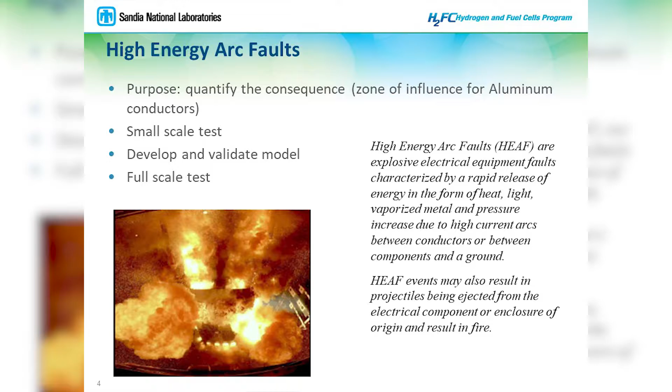So we call them HEAFs. They're high energy arc faults. One of our customers is the Nuclear Regulatory Commission, and they have the regulatory power over nuclear power plants. And these are very important places that you don't want to have fires. And one of the things that we've been looking at is trying to quantify the consequence of a high energy arc fault. You can see in the italics the definition of a high energy arc fault. It's basically

electrical equipment like switchgear, where there's either a fault from phase to phase or phase to ground, and it's caused by like loose connections or dust or a squirrel, anything can bridge this gap. And some of the electrical cabinets in a nuclear power plant are really high voltage, really high amperage, and you get a very energetic release. And it creates plasma, which is also conductive, and it's crazy.

So when you do a risk analysis for a nuclear power plant, what you're looking at is what is the probability that you can't turn it off when you need to. Okay, so it's a core damage probability. It's probability of melting down your core. So there's certain cabling that goes through the power plant that you need to turn it off. And so every compartment in the power plant is analyzed, and every type of scenario fault.

And so when we look at a bank of electrical cabinets, we say, what would happen if this one blew up? And we calculate the zone of influence around that electrical cabinet. And we say, okay, if this cabinet dies, will we impact any of those important cables that we use to turn the power plant off?

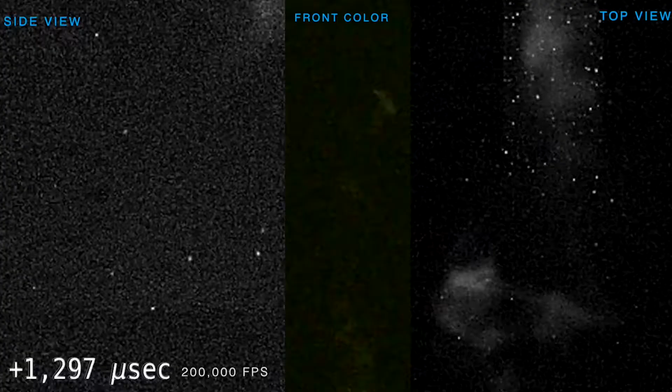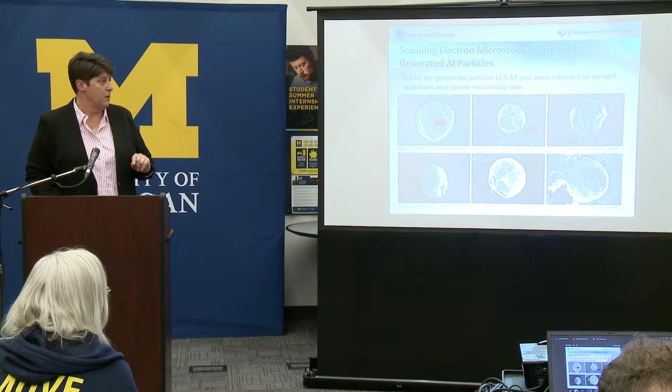But we didn't wait to get the model for the full-scale test. I'll show you those in a minute. But around the test, I didn't put a picture of the test setup, we're capturing some of those particles with carbon tape and aerogel. Aerogel is like 99% air. It's silicon dioxide, and it's really pure and clean, and so every little particle that gets stuck in there, we know we can analyze.

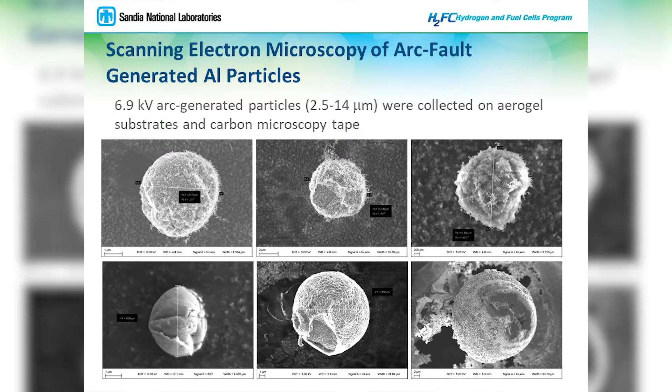And so with the SEM, the microscope, and there's another on the next one. But these are close-ups of some of the particles at nanoscale, and you can see where they're spherical, so we can tell that it was molten. And then you can zoom in and see these dendritic growths, and we can then send those through the analyzer and tell what's the makeup of those particles, right? How much is aluminum oxide?

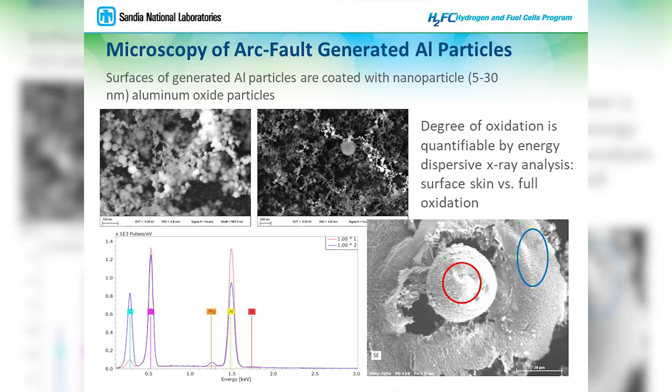How much is copper? We used a copper shorting wire between the aluminum bus bars, so we know what material came off from the shorting wire and what material came off from the aluminum, and then how much aluminum oxide was formed. So this will all go into the energy balance, and we can learn about the excess energy release above copper that aluminum is contributing to this event.

So we did full-scale tests 2 weeks ago, so this is pretty new stuff. There's a facility outside of Philadelphia called KEMA, and they have 9 test cells, and their largest test cell is here. So they've got 3-phase power coming down the side. We park our electrical equipment. We had 4 identical electrical cabinets, just basic switchgear.

We did all 4 of our tests at 6,900 volts. We did 2 different currents, 26,000 amps and 32,000 amps, and then we did 2 second and 4 second releases of the arcs. And so this KEMA facility can generate all the energy, store it up in these big capacitors, these Marx capacitors, and then let it go in the 2 seconds or the 4 seconds. And we can't do this at Sandia without causing a brownout at Albuquerque.

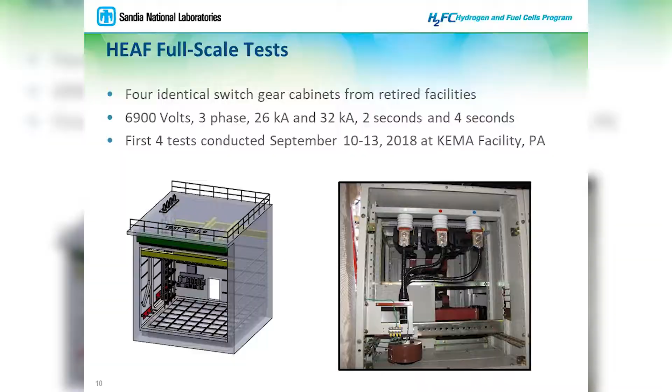So this is a close-up of the inside, like if you take the door off of the electrical cabinet, and these are the 3 phases. These are the bus bars. They just look like bars, and they're coming out at you, and then they're turning down. And then there's an insulator above it in the switchgear. So what we did was wrap a shorting wire, like 24, 32 gauge wire, around all 3 of the phases, so that we knew we were causing a short, and we could make a good boom.

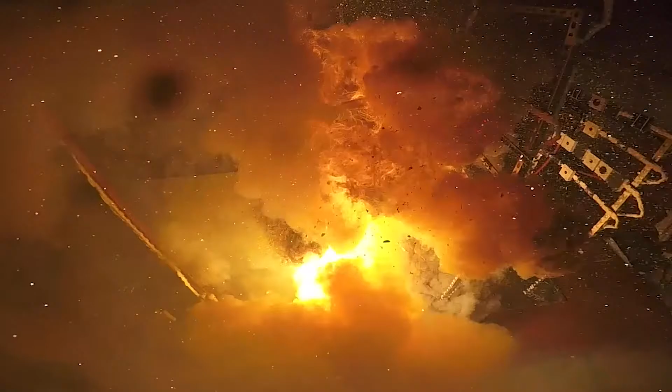And so now I have the color video. So this is about a 5-minute video, so I'm going to keep talking while it's going. So what we're looking at is a GoPro, because those are expendable. This is a GoPro up at the top corner of the largest test. So it was the 32,000 amps for 4 seconds. And it's slowed down pretty slow.

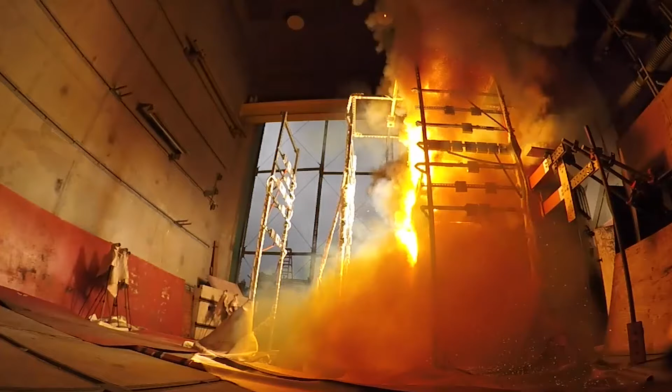In front of it there's 5 different instrumentation racks, one on each side, 2 in front and 1 on the top, and we're measuring with radiometers. We're trying to capture the maximum temperature. We also have carbon tape and aerogels in the instrumentation racks to capture some of the particles that are coming off. This is the other GoPro we have down on the other corner.

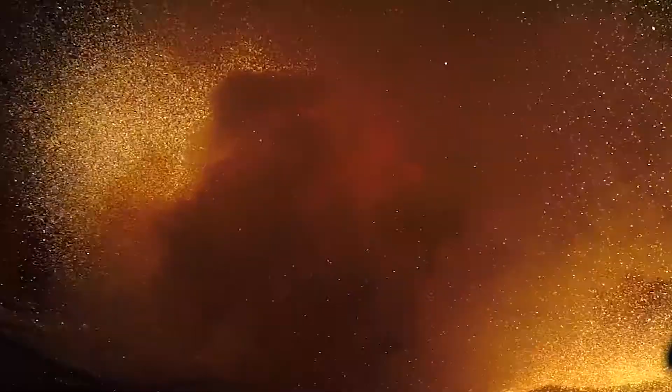And this is slowed down again, it takes about a half a second to breach the cabinet. And so you see the flames venting out of the seams of the cabinet enclosure, and then you can see it breach the cabinet wall. We have several other views that'll keep going, but you can see the zone of influence. You can see where there's a lot of high energy, high temp. We're trying to measure the pressure wave, the shock wave that's coming off, and you can see the hole that it created in the cabinet. I mean, it literally, in 4 seconds, vaporized 4 square feet of steel cabinet.

We also put a camera, this is how you don't get hurt. We put a camera in the test cell, and it's right over here, and it's aimed at a really high quality mirror. And so you'll see later on this camera's view right at the front of the cabinet. There's several views. We had a bank of cameras outside the test cell. And you can see the smoke pretty quickly obliterates your view, and you can't really tell what's going on. But you wouldn't want to be in that room. Nobody. So we didn't hurt our camera, but we're trying to see inside the smoke what exactly is happening.

And so some of their cameras have a high dynamic range, and so you can see the difference in the video. We also had an IR camera, and what they can do is overlay the IR camera on top of the real picture, and then you can see through the smoke, and you can actually measure accurate temperatures off of it. This is the mirrored view, and you can see the front of the panel. See how it buckled? So that's the initial pressure wave of the arc. We did put some carbon tape and this other material that we could analyze later for the graphene structure to try to capture the maximum temperature inside that.

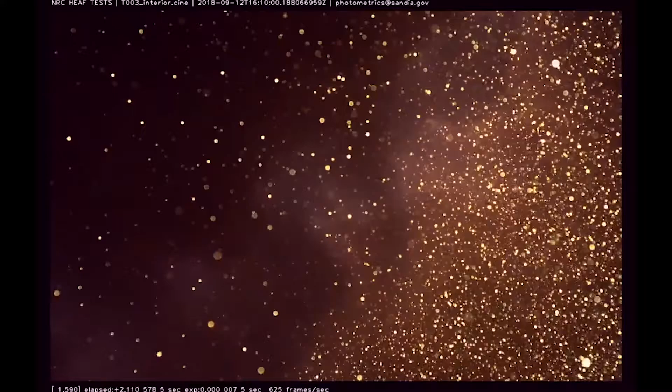So here's the half second. You can see it vaporizing the front of that steel, and then you can see it breach. So that was all half a second. And then it continues to cut that in half. So again, it gets obliterated. And you saw that it breached, and then there was like a step function in the energy. And so that's what we want to study, because that's when the aluminum gets involved, and you can see it.

This is almost the one where he's superimposed the infrared on top of the, you can see the particles, because they were capturing them. What happened in the middle of this test, there's an instrumentation rack on the top, and all of its lines for the data acquisition system got severed. So on this test, they lost all their data from the top.

So here we go. Here we've superimposed, so you can see this through the smoke. You can see it venting out of the sides of the cabinet. And then you'll see it breach the front. He slows it down for me. Sort of like a dragon. Yeah. And then you'll watch it. It's breached, and then it jumps. And you can see the wires dangling.

What we found in the small scale test was that the arc is made, and then the buoyancy of those hot gases causes it to rise up and break, and then the arc reforms. And you can see it pulsing, and we saw that only in the small scale. So when we're looking at the large scale, we're seeing that pulsing, and we're going to decide whether it was the phase, the normal sinusoidal pattern of the power, or if it was the arcing breaking and reforming. Pretty cool stuff.

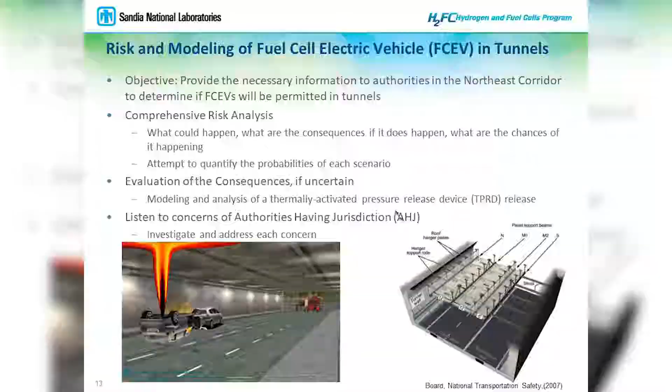Okay, so we did a comprehensive risk analysis. What could happen, right? And then if it does happen, what are the consequences? And then what are the chances of that happening? If we understood the consequence pretty well, we said, okay. If we didn't, I didn't know. He's like, is my concrete going to spall? I'm like, I don't know. Let's find out, right?

And we got tunnel data, real data from the US if we could find it, worldwide if we couldn't. So we have data from Norway, we have data from whatever's published. And we could do sensitivity analysis around these probabilities because it's easy to build a Monte Carlo on this event tree.

And what we use to determine minor or severe is if an accident had injuries or fatalities. So if nobody's hurt, it's probably a fender bender, and you probably haven't hurt the hydrogen system either, right? We also have data from NHTSA doing crash testing. There's not a lot of tests. They've only done 5 or 6 full-scale tests with a fully loaded hydrogen vehicle with the same side impact, rear impact, corner impact tests. So we have that data. None of their tests released any hydrogen. So that's reflected in this too.

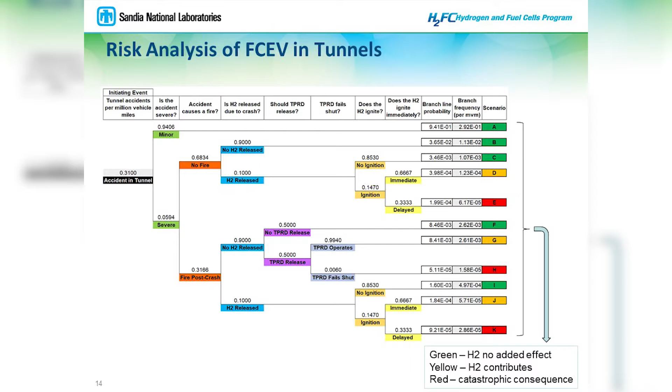And we made worst case decisions always. The hydrogen tank was completely full. It was one tank instead of 3 tanks, like the Toyota vehicle, right? So we're releasing all 6 kilograms instead of just 1 tank's worth. It takes about 5 minutes to blow down a tank through the TPRD. And so we assumed that the maximum mass flow rate was coming for the entire 5 minutes. We really made this very conservative worst case estimate. And so you can see we calculated what the temperature might be at the ceiling, just using numerical calculations.

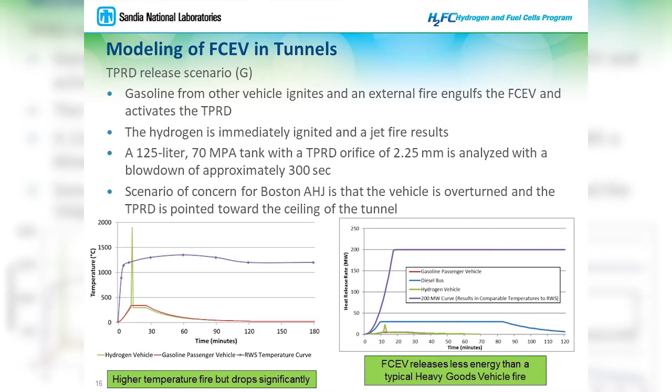But the heat release rate, if you look at it, here's that tanker truck burning. The blue line is a bus. And so a light passenger vehicle just venting its hydrogen into an existing fire, which is already a problem, doesn't violate the heat release rate regulation, but the temperature went over. So he said, analyze this for me. Find out, is my steel going to be compromised? Find out if my concrete's going to be compromised.

And so this is the schematic I was talking about, where the bolts are anchored up into the bedrock. And we put a fire conservatively right on that steel support, so that we could have the best chance of getting the heat up these hangers and into the bolt. We looked at 2 different typical tunnels in the Boston area, and we looked at the potential for spalling the concrete.

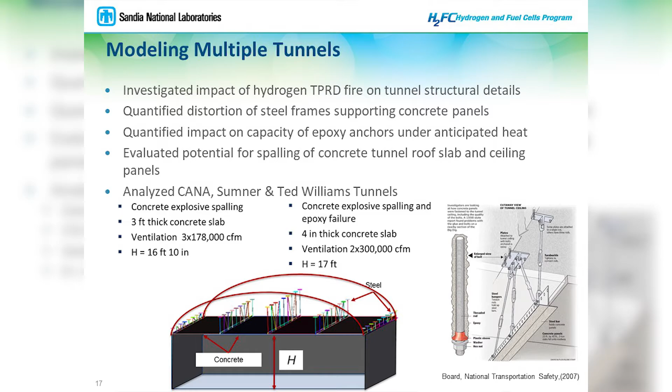So we did this with and without ventilation. Tunnels have ventilation. Some older tunnels have crappy ventilation, and sometimes the ventilation kicks up to a higher level during an emergency, and sometimes it doesn't work. So we're like, okay, conservative. What if the ventilation's not working at all?

And so we looked at this hot spot on the ceiling. You can see it's about a 12-foot diameter hot spot, and it gets pretty hot. It gets close to 2,000 degrees. It's not going to last 5 minutes, but it could, if it vented for 5 whole minutes, if the flame stays touching the ceiling.

The thing about hydrogen, there's no carbons, so it doesn't radiate. It radiates very weakly. So you could hold your hand this far away from a hydrogen flame and not move it. It's not hot next to it, it's hot in it. And it's very hot in it. So as long as the flame is touching the ceiling, you get this hot spot. And so we have CFD models and heat transfer models of the concrete panels and the actual tunnel itself.

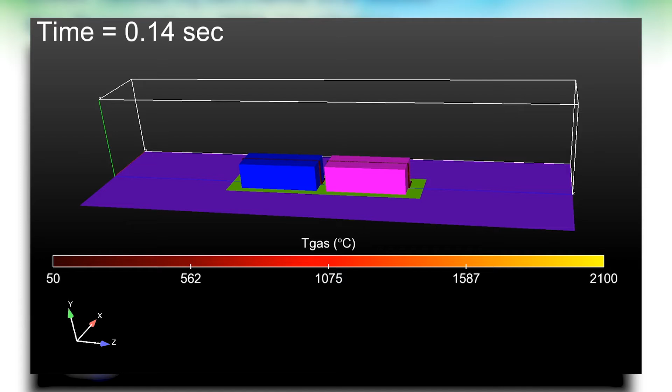And then we turned the ventilation on. You can see that was a 12-foot diameter hot spot. With the ventilation on, it blows the flame over like you would expect. These models were developed for nuclear weapons, so they're really, really precise. So I trust these models. These aren't models that you can use. They're internal to Sandia only, but this one's called Fuego. It's fire.

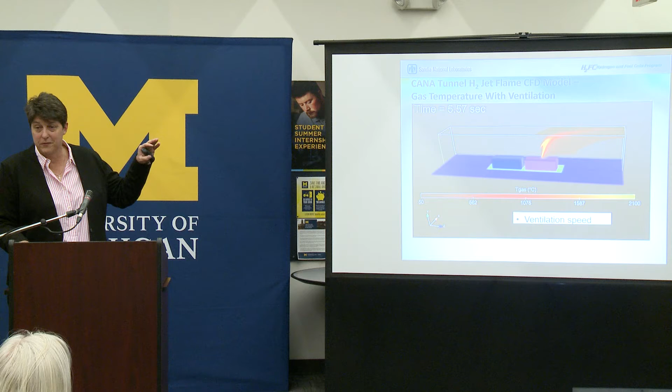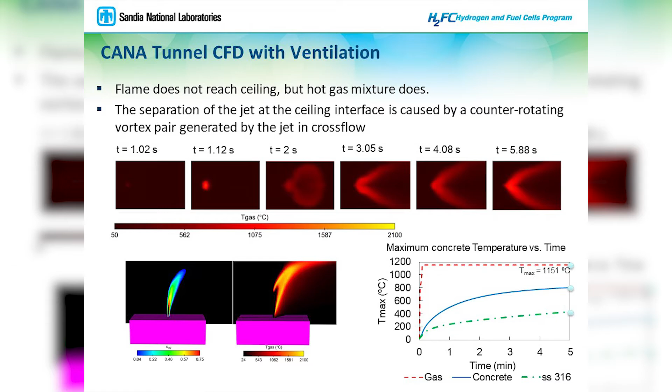And so we can take the boundary conditions at the top of the tunnel and import it into the heat transfer model, which calculates the heat transfer through that block of concrete. With the ventilation on, you get this vortex that's pretty well documented in fluid flow. And you can see it's more like a 7-foot diameter. So ventilation really helps lower that hot spot. It also lowers it out of the 2,000 degrees to under 1,200 degrees. So it takes a lot of the heat out of that hot spot.

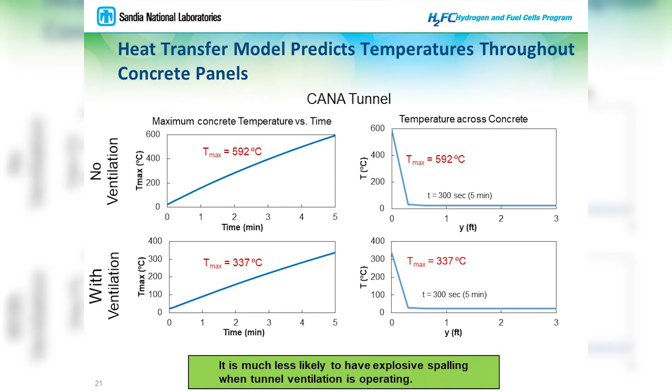So then we looked at the maximum temperatures and compared that to other research on concrete spalling. We found it takes about 30 minutes of exposure to a hot fire to make the explosive spalling happen. There's several mechanisms, it's actually kind of complicated. But we're nowhere near. If it were a straight up blowdown, the flame would be impinging on the ceiling for about 1.5 minutes, not 30 minutes. So we were able to tell the structural engineer that it's really unlikely you're going to spall from the hydrogen. If you've wrecked several cars and you have a big hydrocarbon fire, you could probably spall. It happens now. You can find pictures of tunnel spalling.

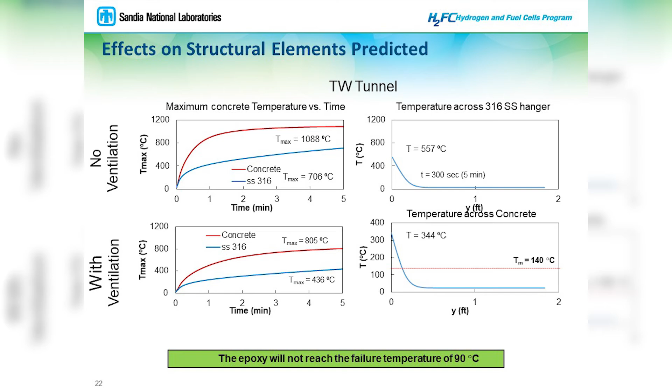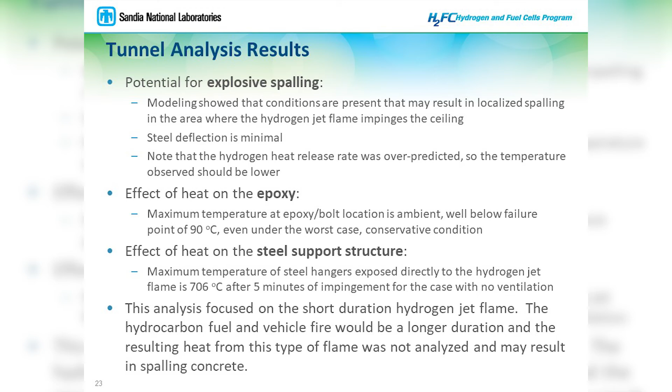On your steel, the epoxy melts at 140 degrees, and it starts to degrade around 90 degrees. What we found is up at the top, at the shortest hanger, the epoxy is still at ambient temperature. So we can tell them, your concrete bolts are not going to come out of your tunnel. Concrete's not going to fall on people. And so he said, yeah, this is great. I'm going to buy a hydrogen vehicle. These are safer than gasoline because the hydrogen stays in the tank.

But our problem right now is that he was not the lead engineer for Massachusetts Department of Transportation, and he recommended to the lead engineer that they allow the vehicles, and she said no. She didn't want to accept any additional risk because she didn't even read our report yet. So we're working on that. It's a reputational risk, and nobody wants to be first. Nobody wants to be the first one to allow these vehicles in their tunnel.

So now we're working on a national solution. Instead of tunnel by tunnel, I'm working with the Federal Highway Administration and NHTSA, and we're going to try to get all the tunnel owners together in a stakeholder group to say, give me your nightmares. I'm going to show you what the real analysis shows and you can decide. And maybe we can say, tunnels that have good ventilation, sprinklers, an emergency egress tunnel, because they're worried about public safety.

Those tunnels are fine. And so it may be that the Holland Tunnel and the Lincoln Tunnel that were built in 1927 don't ever allow them. But that's okay because you could take a bridge. But in Boston particularly, their tunnels are in pretty good shape and they're kind of new, especially once you go to the airport. So I'm optimistic. But what's really cool at Sandia is I'm working on a problem that matters to the country. That's pretty cool. So that's it.